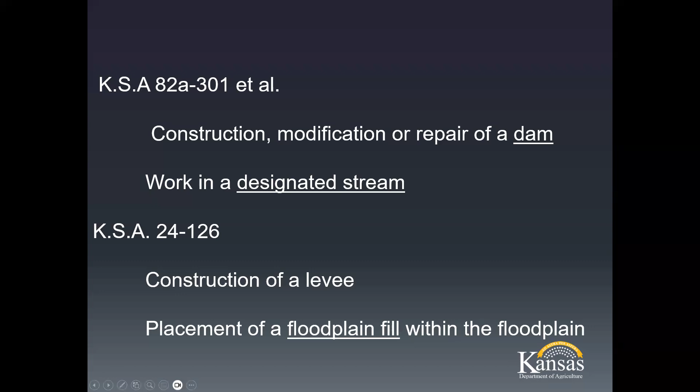That is one definition, and the other is simply 25 feet high from the streambed slope to the crest of the dam. Dry detention ponds are included in this definition because they are for the impoundment of water.

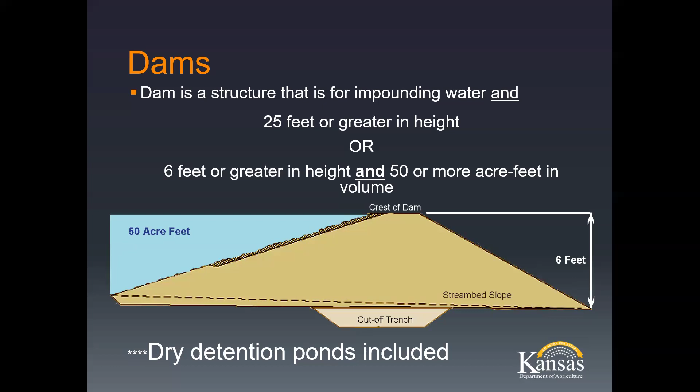One thing to remember is the difference between maintenance and repair. Maintenance items are removing woody vegetation from the dam, grass seeding, getting rid of burrowing animals inside the dam, replenishment of riprap, or removal of debris from the spillway. None of that requires a permit from the state—it's just part of maintaining the dam.

However, the types of repairs I've listed—pipe replacements, slip lining of pipes, embankment modifications, modifying the auxiliary spillway—require a permit from our office. So if someone comes to you for that, it would require a permit from our office to do that.

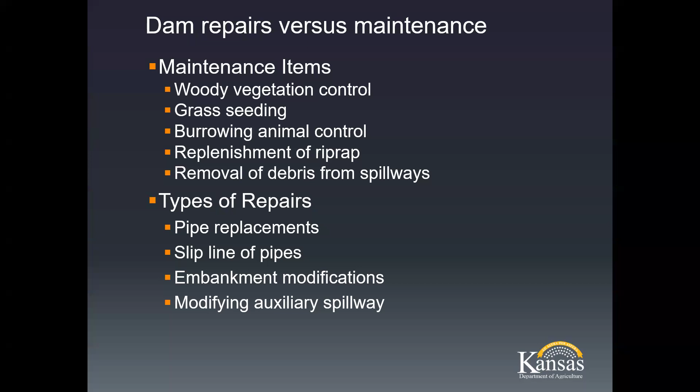In 2013, the legislation created what's called a Class A exemption. To walk through that exemption: the dam has to be less than 30 feet high from the top to the streambed slope and has storage less than 125 acre feet at the emergency spillway. It also has to be low hazard, meaning there are no homes, major roads, or major railroads downstream of it, so that if it were to breach, it wouldn't hurt anyone. That's what we consider a low hazard.

A registration is required through the Division of Water Resources, and the dam safety team must make a determination on whether it meets that qualification. That's why the registration is required—our dam safety team looks at it and makes sure it does meet the qualification of a Class A dam.

Just because it's a Class A dam does not mean it's exempt from all permitting. It could still require a floodplain fill permit, and the determination letter that comes back from dam safety tells you what the next step is.

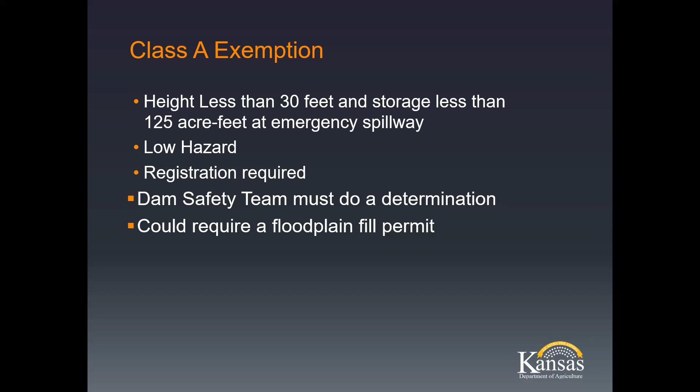Once we receive that information, our dam safety team takes a look at it, makes sure they agree with you that it is a Class A dam, and then tells us the next steps for that.

What I would always recommend with a dam or any kind of pond is to first hire an engineer. The reason I say hire an engineer is because these things can be rather tricky, and you don't necessarily want to get into a mess. The second thing is to get a determination from both DWR and the U.S. Army Corps of Engineers.

The dam I have a picture of is in Riley County, and it was built without a permit. The landowner is in a bit of trouble right now because it does not meet those exemptions, so they need to hire an engineer after the fact. So I always recommend that if you're looking at that size of a pond or dam, hire an engineer first.

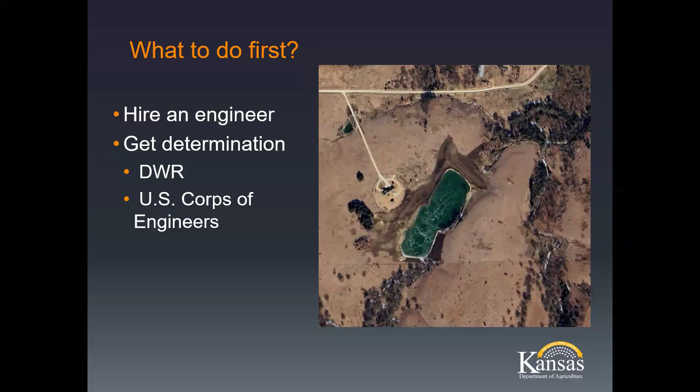The second thing you need to be aware of with ponds and dams is that the state of Kansas requires a water appropriation permit if you're going to hold more than 15 acre-feet of storage, or if you're going to use a groundwater well for supplementation. We have field offices in Topeka, Stafford, Stockton, and Garden City to help with water appropriations. Even if you're going to have a 15-acre-foot pond just for fish or for your kids to swim in, it's still considered recreation, and you would need a water appropriations permit from the state of Kansas.

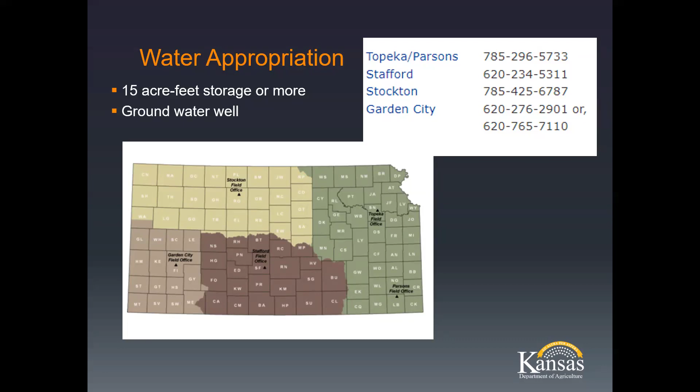Moving away from ponds, the second thing that requires a permit under the Stream Obstruction Act is working in a designated stream. The legislature defines a designated stream not as a blue line, as some people think, but as a natural or man-made channel that drains a watershed area of, in the eastern part of our state, 1 square mile or more; in the middle of the state, 2 square miles or more; or in the western part, 3 square miles or more.

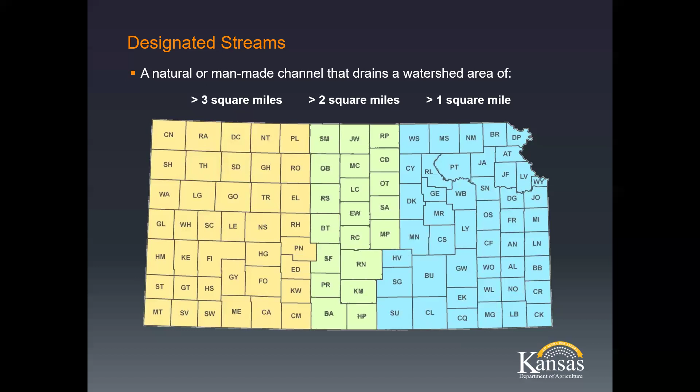A lot of you are going to ask me next, how do I know how much drainage area comes to a certain location? Well, USGS came up with a great tool called USGS Stream Stats. You can Google it. It allows you to find any location in the state of Kansas, click on that particular location, and it will tell you the drainage area for that stream.

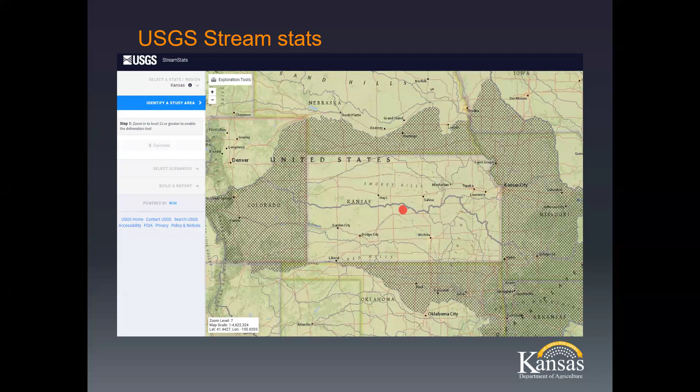It's not perfect. There are some places in the western part of our state that are relatively flat and require some more determination. If you can't get the tool to work well and you're not sure, you can always contact DWR, and we'd be happy to give you a determination. That's how our team starts our determination, using USGS Stream Stats.

So what is considered work? Within the channel of the designated stream, within the banks, we consider that work. So you can construct or modify a stream obstruction, modify the stream channel, or remove aggregate from or dredge between the bank lines. Those all require permitting from DWR.

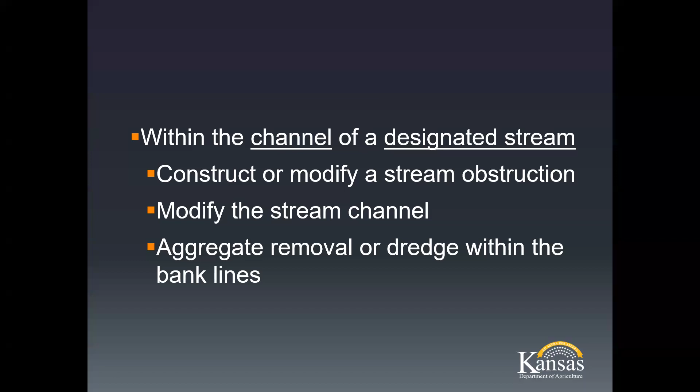I'm going to outline each one and give you some pictures of what we're talking about. A stream obstruction could be a culvert, a bridge, a low water crossing, a pipeline or utility crossing, or even a temporary crossing. A lot of us in our counties are dealing with pipeline companies and wind turbine companies accessing property. If they cross a jurisdictional stream and are going to put a crossing in there, even if it's temporary, they will require a permit from DWR prior to putting it in.

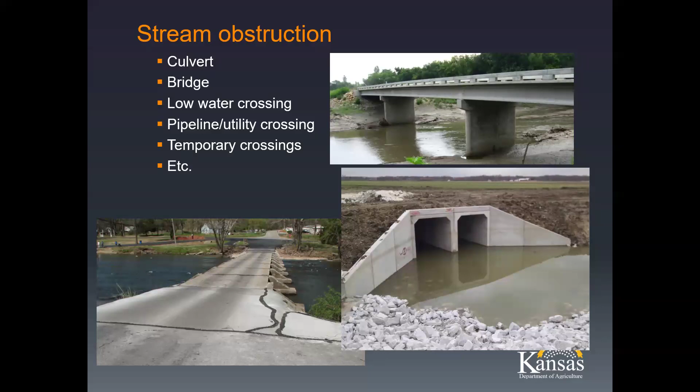Modifying a stream channel - what do I mean by that? It could be straightening the stream. Instead of having bends in it, a lot of our farmer friends like to straighten those channels out so they can farm more efficiently. It could also be cleaning out a stream - I get a lot of calls about that. If you're going to remove sediment from a stream and change that cross section, you're going to need a permit from DWR if it is a designated stream.

Widening a stream is the same thing - if you're going to make that cross section bigger or even smaller, you're going to have to get a permit from DWR. And my favorite, stream bank stabilization or revetment - if you're going to put material along that stream channel and lay back those stream banks so it doesn't erode anymore, you're going to need a permit from DWR.

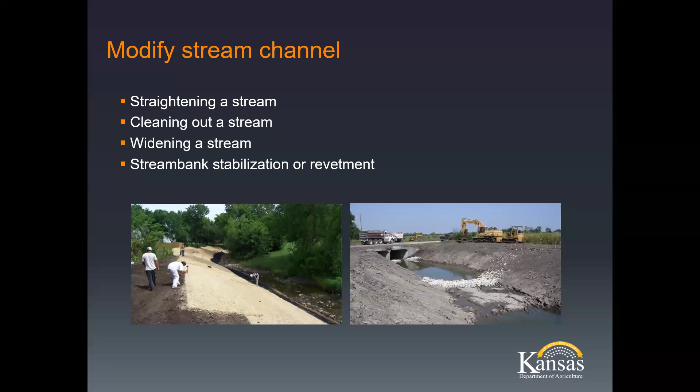Aggregate removal - a lot of our counties like to remove aggregate to be used on roads. If you're going to use it for roads or for sale, and the drainage area is more than 50 square miles, you're going to need a permit. Or if you're harvesting more than 100 cubic yards per year, you're going to need a permit from DWR.

The picture on top is of some gravel removal or gravel bar removal for county use. And the one below is sand dredging on the Kansas River. Both of those required permitting from our office.

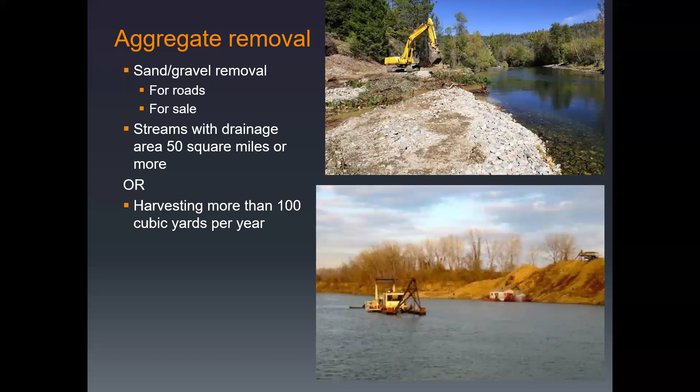So how do I get a permit? Well, we have an application. It can be found on our website. There's a couple pitfalls I'd like to bring to your attention. The first one is to complete the application form all the way.

It's not a test, we're not going to grade you on it, but we do need as much information as possible. The key one is the owner contact information. We will need that information to issue the permit to.

We need a location map. We need plans, we need construction plans. We'll need a plan view, which is a top side view, and a cross-section view, or the side view. We'll need specifications. We'll need to know how you're going to construct this project.

We need a benchmark. We need the appropriate fee. We do require a fee to do our applications. I don't get paid otherwise.

We may need a hydraulic analysis. If you are doing something within an easement or you don't own the property, we will need a copy of that easement or owner permission. We do not give permits to other people to do work on other people's property.

If the side slopes of the channel change are steeper than 2 to 1, we're going to need something to tell us that those are going to be stable. Are you using some kind of geofabric, something like that?

And if the mean annual flow is greater than 100 CFS, we're going to need a licensed engineer to do all this for you. Mean annual flow are larger rivers. So the Ninnescah, the Kansas, Arkansas, Little Arkansas are all greater than 100 CFS.

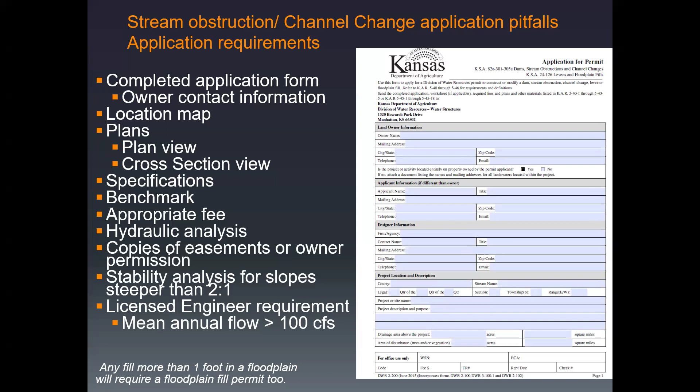And then a little side note, any fill more than 1 foot in a floodplain will require a floodplain fill permit too. So if you're going to do something in the channel and as a side effect the road will put more than 1 foot of fill in the floodplain outside the channel, that will require a floodplain fill permit too. We'll talk about that here in a minute.

So I'm going to give you some examples of what I'm looking for. This is a great aerial map that we got. You can use a Google map or the county GIS and just point out where the project is. You may know where the project is, but we have a great big state and sometimes we don't know exactly where you're talking about.

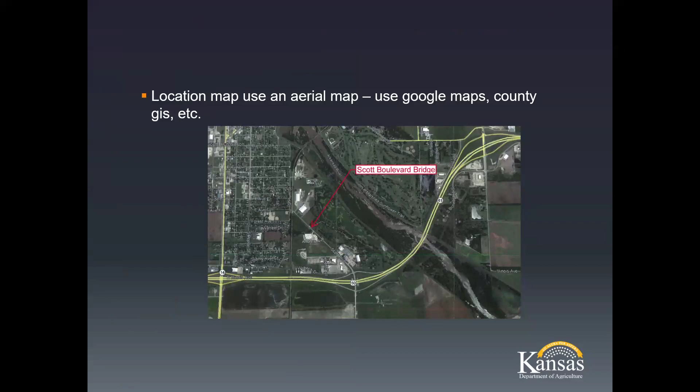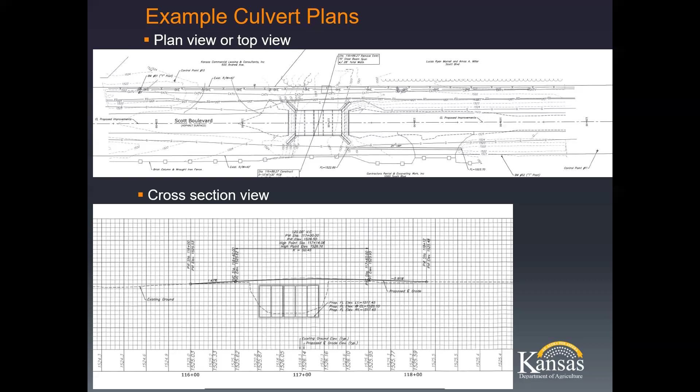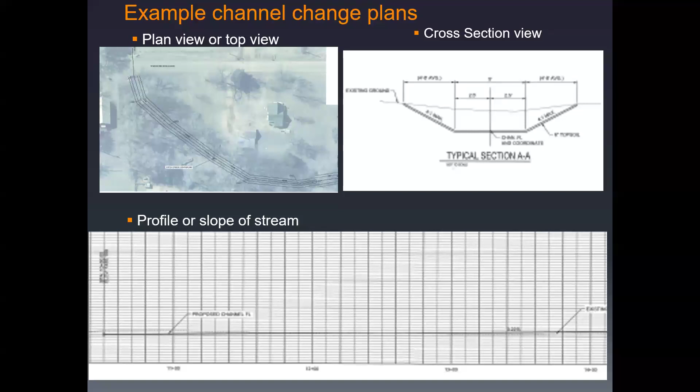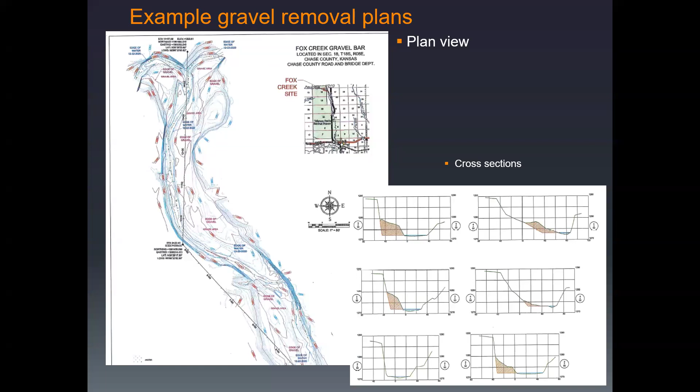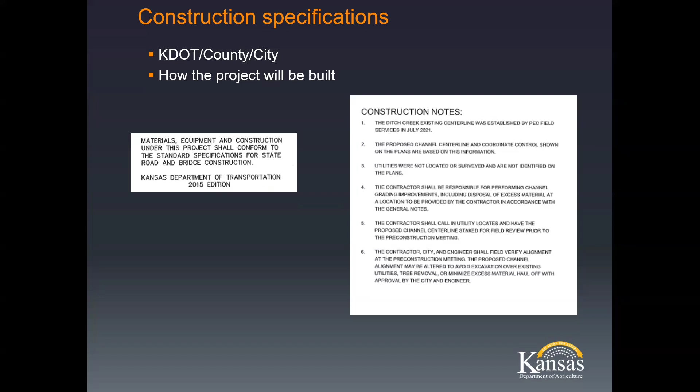Construction specifications tell me how the project will be built. You can state that you'll use KDOT specifications and what edition you'll be using, or you can outline what will be happening. So on one side we just have the KDOT specifications, and on the other we have a contractor outlining exactly what will be happening in that channel. We need this information to make sure we understand how this will be built.

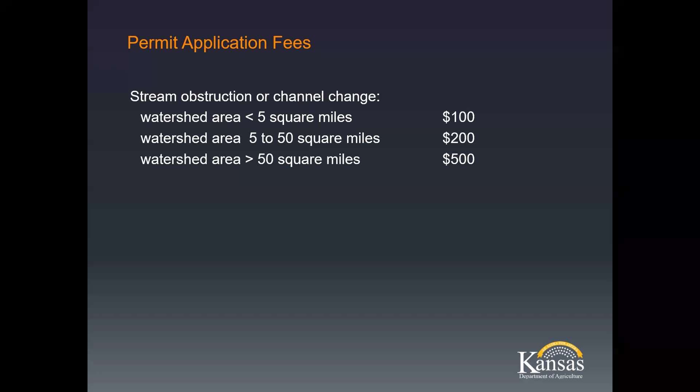Fees: if you're just doing a stream obstruction or channel change and not doing any work in the floodplain outside of that channel, then for watershed area less than 5 square miles it's $100. Watershed area 5 to 50 square miles is $200, and watershed area greater than 50 square miles is $500. Please note we will not start your application review until you send us money.

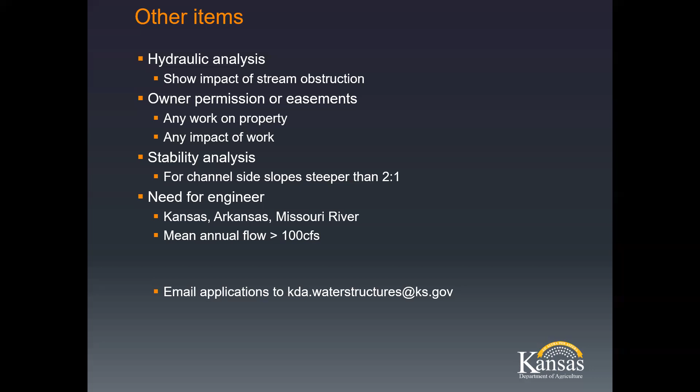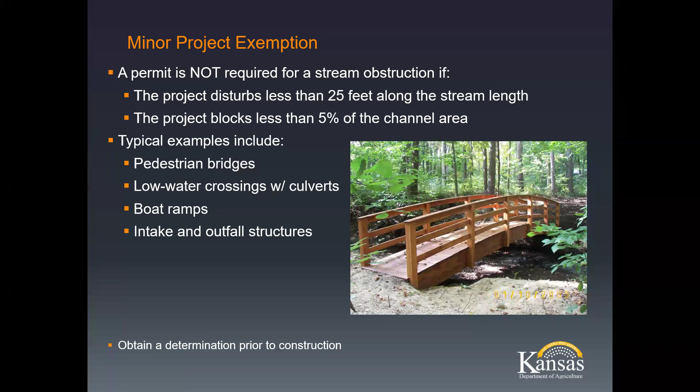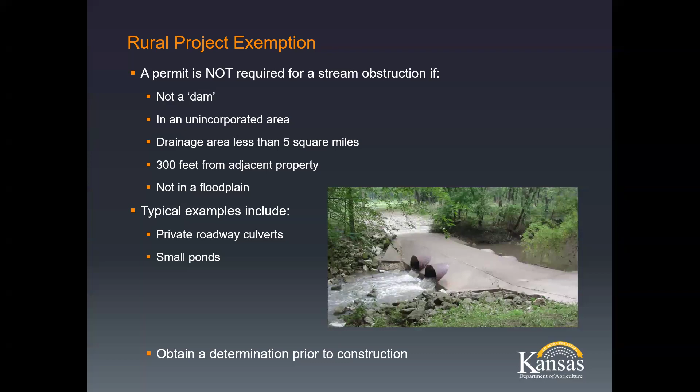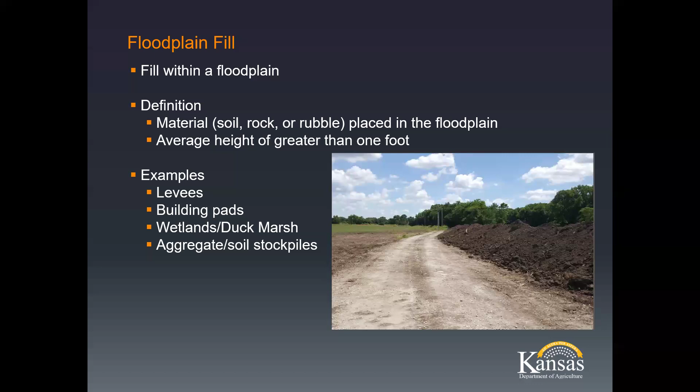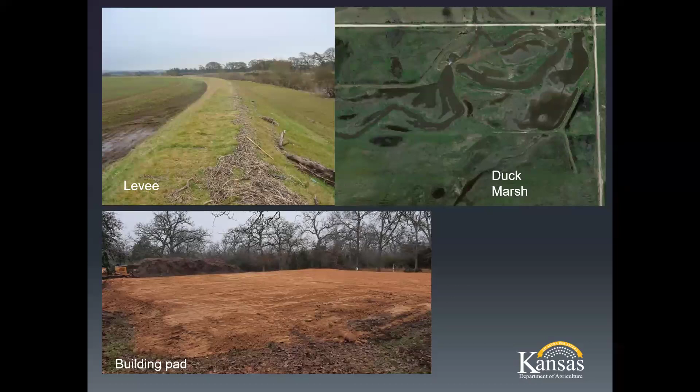So a quick note about unconsolidated material stockpiles. No permit is required if it meets one of the criteria: if the stockpile has been there since 1929 or before the FIRM map was published, or the sand and gravel site has been there before 2006, and it meets all the following: the stockpile is outside of the floodway, it will be there less than 270 days, and the site will be restored after it's removed. So we do allow temporary stockpiling, but it cannot obstruct stream flow, cannot redirect stream flow, and cannot block culverts or channels. Again, if you have a stockpile in your plans, I would recommend getting a determination from DWR before putting that stockpile in.

I get the question all the time: how do I know if I'm in a floodplain? Well, one way is to use our FEMA map service center. You can put in an address, or longitude and latitude coordinates, and it will bring up the most current effective map, which can tell you if you're in a floodplain. That is what we use on our side for determination.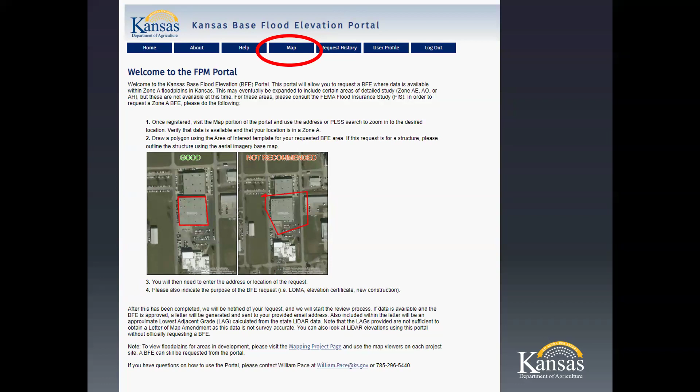If you need a BFE, or base flood elevation, in a Zone A, we have a portal you can use to find that out. You have to create a login. Then you go to the map, put a square around what you need, and ask for a BFE. William Pace is in charge of this, and he does a fantastic job helping us out with BFE determinations - my hat goes out to him. You can also obtain modeling from this portal if you need the HEC-RAS model for a project. Again, Bill is a great resource for this.

So we use the same application form for stream obstructions as we do for floodplain fills. It kind of helps us with paperwork. Again, these are some things you need to be aware of when you fill out an application.

One, please complete the application. We'll need a location map. We'll need some plans: a plan view or a grading plan and a cross section view. We'll need specifications, a benchmark, and the appropriate fee. For floodplain fills, any slope steeper than 3:1 requires a slope stability analysis.

A hydraulic analysis, especially a floodway analysis; if you're putting fill in the floodway, you will need a no rise. That's usually done by HEC-RAS. And a licensed engineer is required if it's in the floodway, if the height of the fill is greater than 4 feet, or if it's a Class C levee. A Class C levee is one where, if the levee were to fail, people would be in danger. So homes, that kind of thing, would be in danger.

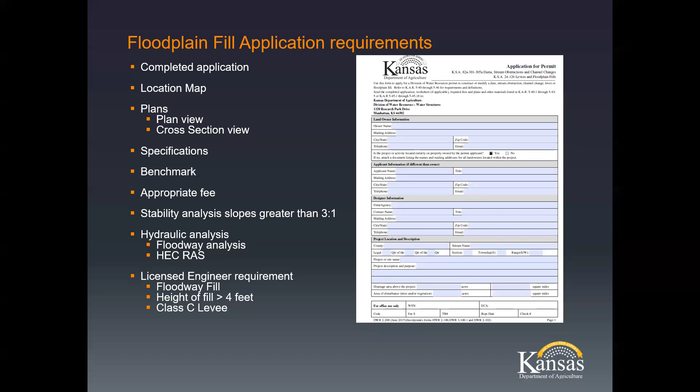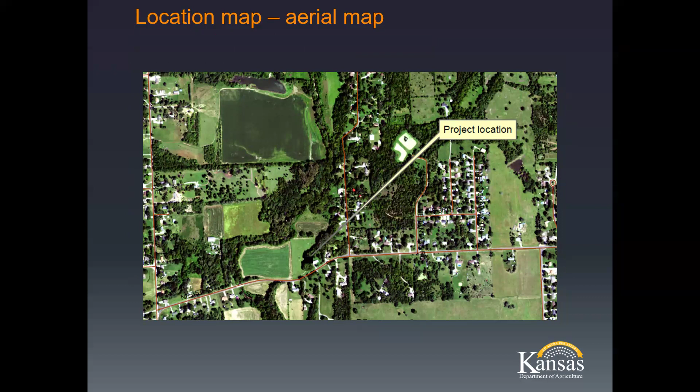So this is a floodplain fill application that we got a couple of years ago. This is the aerial map we got. This is the project location. This is the location map. This is the grading plan with the contours. You can see that it has the existing contours and the proposed contours, and it shows us the finished floor of the building.

It also had a cross section that shows us the finished floor of the building, the proposed grade, and the existing grade. All of this information is required and also gives us a lot of ideas of how it will be constructed and that it will be stable.

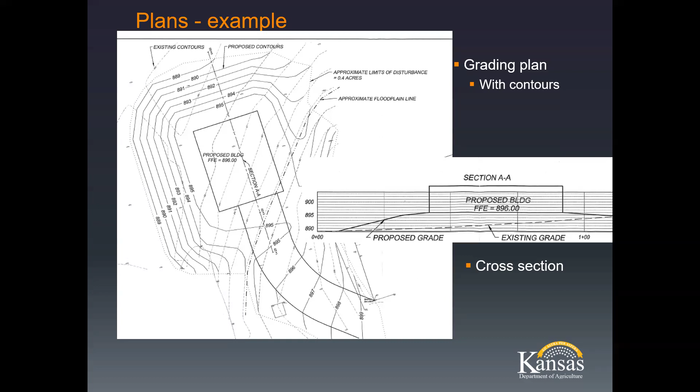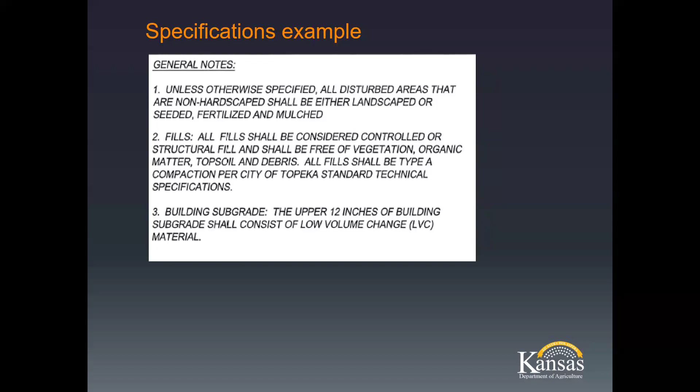Specifications. We do need specifications. We need to know how that fill will be compacted and what kind of fill you will be using. This one said that the fills will be compacted per the City of Topeka. And so that is helpful to make sure that that building will be stable.

Fees. So a Class A levee is an ag levee, so the only thing that will be hurt is ag land. That's $100. A Class B levee is if the levee were to fail, it may take out 1 or 2 homes or a road. It's $300. And a Class C levee, like I said before, is where major damage will be done.

It's $500. Floodplain fringe is a fringe that is adjacent to the floodway. That's $100. Floodplain zone A is $300. And floodway fill is $500.

Now there are after the fact fees for those projects that forgot to get a permit. These are not something you pay and then you can construct. It means that you forgot. It's twice the fees, so $200, $600, and $1,000. We definitely recommend that nobody has to pay after the fact fees.

So other items that I mentioned: the hydraulic analysis. It shows the impact of the fill, and it's required for all applications except for fringe fills. The owner permission or easements. The stability analysis for slopes steeper than 3:1. And you need an engineer, again, for Class C levees, fills greater than 4 feet, or fills in the floodway. You can email your applications to the email address that's on our application, but we will not process the application until the fees are received.

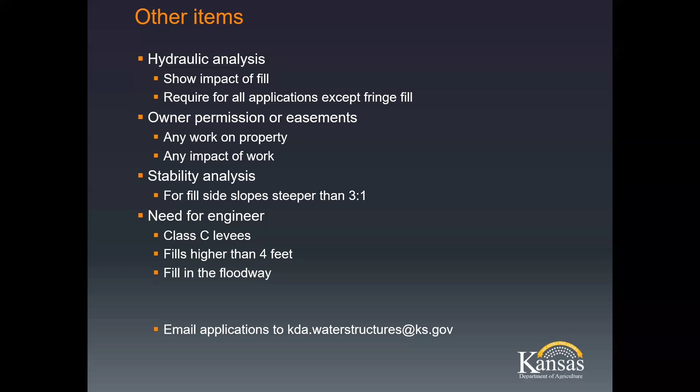Quickly, I'm going to talk about projects that have both. Typically, there are projects that have stream obstructions or channel changes and floodplain fill at the same time. You always take the higher of the 2 fees. So for this one, as you can see, it was a bridge. The existing ground is lower than the proposed ground, so they're going to put fill in the floodplain. So you would take the higher fee for this one. It would be $300, because they were putting fill in a zone A floodplain.

If you're not sure, you can always contact our office and we'll be happy to tell you what the fee should be. So again, the example that I just showed you had a drainage area of 4 square miles, so it was $100, and then it was in a zone A, so it's $300. So you would have the $300. You take the higher of the two fees. So 300; it's not 400 total. It's the higher of the two fees.

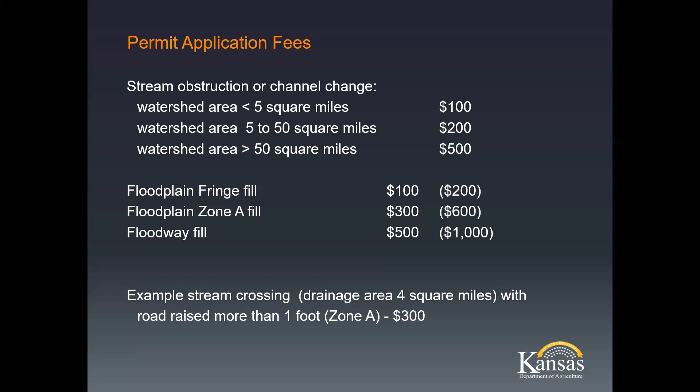So I get this question a lot. Does everybody have to get a permit? Yes, everybody has to. It actually says in the state law that any person, partnership, association, corporation, agency, or political subdivision of the state government has to get a permit. So that includes KDOT, the city, the county, the levee district, the township, the pipeline companies, the wind turbines, who else? City councilmen, county councilmen, watershed districts. I could go on and on.

Now, a question that came up a couple years ago when I gave this presentation was, what about the railroads? Well, the railroads under U.S. law 49 U.S.C. 10501 are under the jurisdiction of the Surface Transportation Board and are exempt from state and local permits as long as they are working within their existing right-of-way. Now, if they're putting in a new rail line or purchasing more right-of-way, then they would require state and local permitting. But if they're within their right-of-way, they can do work without one.

DWR has had no issues trying to get permitting from railroads. They've been pretty helpful getting permits even though they don't require them, but they are exempt per this U.S. law.

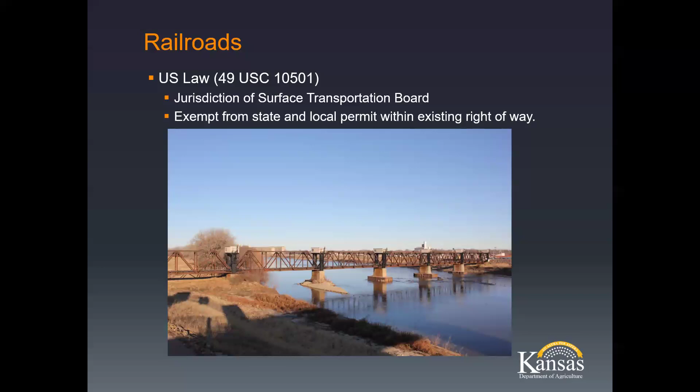So sometimes I get asked a lot, why does it take so long for a floodplain fill or for permits to get approved? There is a state law called the Environmental Coordination Act that all applications received for DWR have to go through a 30-day review. That 30-day review goes through 7 state agencies: the Kansas Department of Wildlife, Parks and Tourism, the Kansas Forest Service, the State Biological Survey, the Kansas Department of Health and Environment, State Historical Society, the Kansas Department of Agriculture Division of Conservation, and the State Corporation Commission.

They get 30 days on a regular permit to review the application for any environmental impacts. If you qualify for a general permit rather than a regular permit, then it's 7 days instead of 30 days. So it narrows that down to 7 days.

If you require any additional information, you can find it on our website under Divisions and Programs, Division of Water Resources, Stream Obstruction and Floodplain Fill Permits. All this information is on there. You can also give us a call. My name again is Janelle Phillips. I do the state permits. For floodplain ordinance questions, you can call my friend Cheyenne. FEMA questions, you can call my friend Tara. To obtain HEC-RAS models, you can call my friend Bill, or you can use that BFE portal, which is very helpful. And then complaint issues, problems, people not doing what you want them to do, you can give me a call and I'll give it a try to make them comply with your regulations.

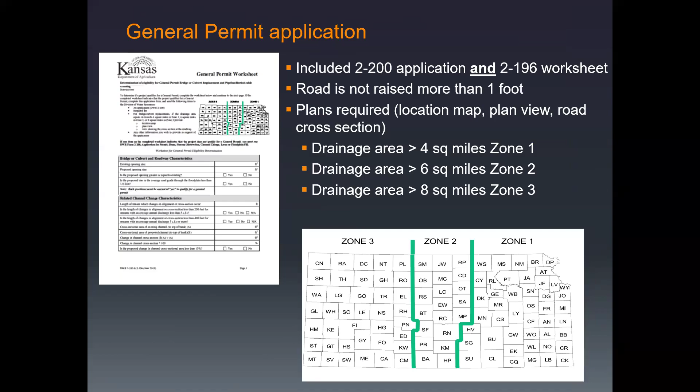In the chat, Eddie is asking, is the acre feet measured as the surface area of the lake or pond? So acre feet is actually a volume. So if you imagine in your head, you have a 3-acre pond, surface acres, and then you dig it 5 feet deep all the way around. We all know that that's not how a pond works, but this is how I tell people: if it's 5 feet deep all the way around like a bathtub, that would be 15 acre feet. So it doesn't go by surface acres. Okay, yep, that answers the question.